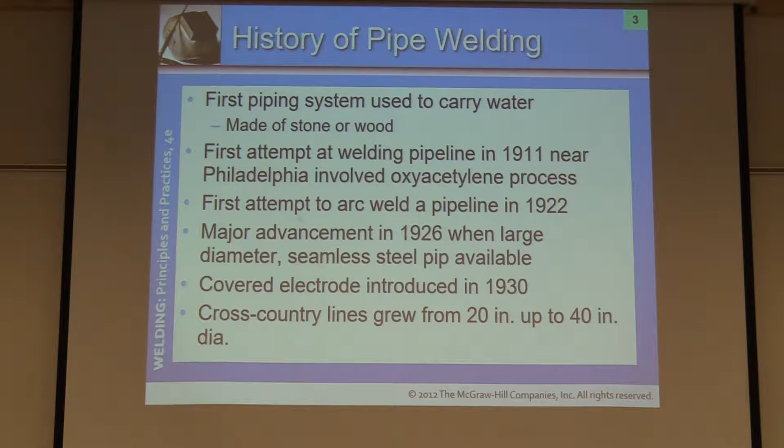The first attempt at a welding pipeline was in 1911 with oxyacetylene. First attempt to arc weld it was in 1922. Major advancements in 1926 when large diameter seamless steel pipe was available. Covered electrode was introduced in 1930, huge advancements.

So forth, let's talk about pipe welding today. You can always follow through on your book. We're on page 481. Most of the top portions are headlines within your book. If you're seeing this on a PowerPoint, you may want to highlight it in the book as well. Find where it's written, highlight it, be able to come back and study and just take a glance back over it.

Pipe welding today, they're made out of many materials and many different sizes. Of course, there's naturally more advancements in technology and metallurgy. We can do a lot of things.

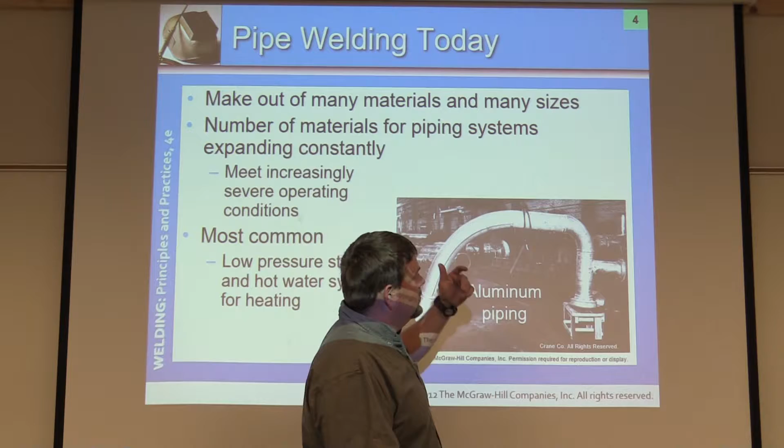They can be for many different applications, from underground sewage systems to oil and gas refineries across the nation, even your normal gas into your house and your water lines underneath the city, providing water and sewer lines to your home, as well as steam, boiler systems, hydroelectric, so forth. Piping can be used to carry a medium over a distance and maintain pressure for a lot of different uses within the industrial world today.

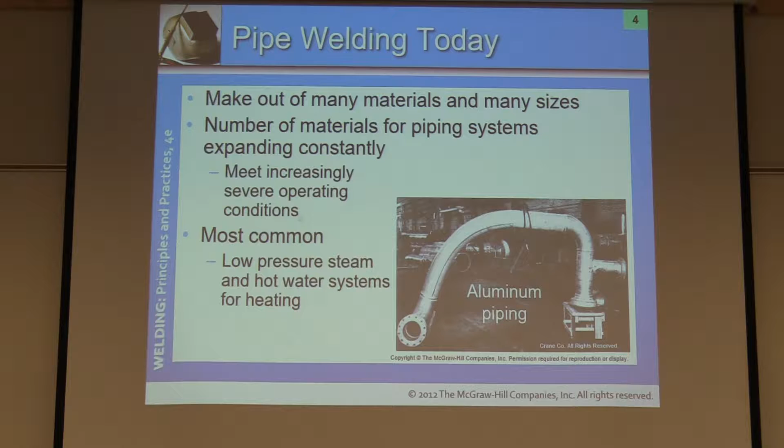Most common is a low pressure system, low pressure steam, hot water systems for heating. This is typically systems up to about 30 or 40 psi, just carrying pressure along. They're not a high pressure system, say from 1,500 to 2,000 pounds psi of steam. Naturally, low pressure systems are less critical, less dangerous than high pressure systems.

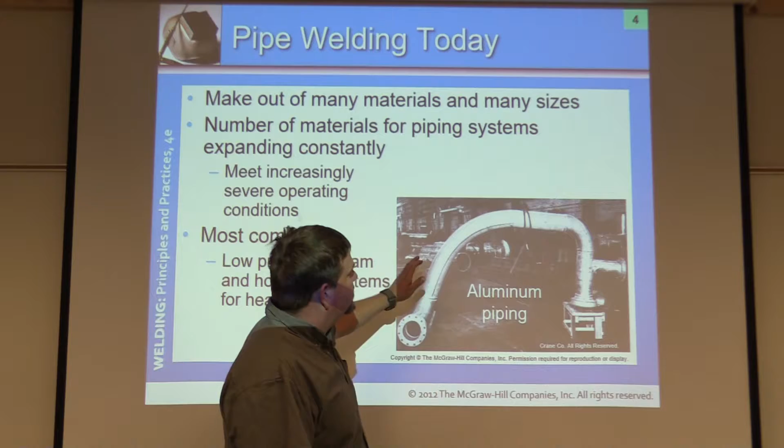Some of your low pressure systems might include caustic acids and so forth. You don't want to compress them, but you want to move them across an area. Fertilizer plants - there's a million different applications we can get into. This book talks a little bit about pipeline stuff, but remember, we use piping systems in so many different things other than just pipelines.

So many piping systems are under very high temperatures and pressure. Joint tightness is essential - power plants, nuclear sites. Welded pipeline forms the underground network, transports natural gas, crude oil, drinking water, and fuel for transportation, for sure. So we've got a branch line here, individual headers coming off of it, possibly tying into something else.

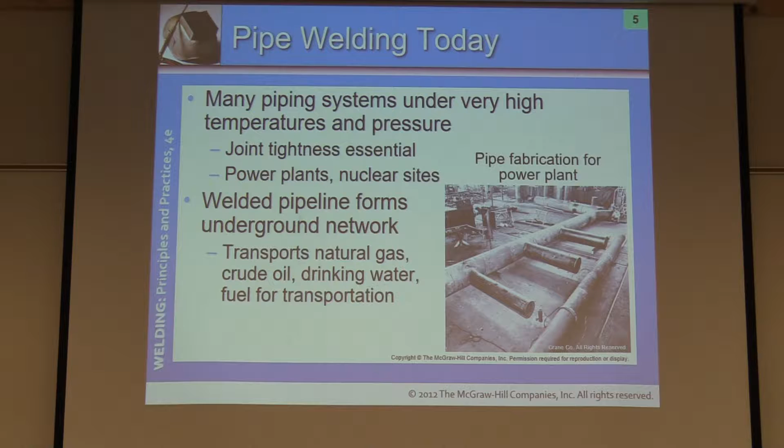Both welders start at the top and weld from top to bottom at the same rate - hopefully not the same speed though, one will be a little faster than the other almost always. Or you can pause for a second, let the other welder get going for a second or two, and then you start, so that you're not ending at the same time. One will finish, and then you tie in.

This helps control distortion. It helps your pipe from opening up on one side. If you were just to weld down one side, the weld contracts and pulls, so your gap would get wider on that side. This speeds up time, makes it a lot faster - you can just keep going down the production line and so forth.

Here, welder works from each side of the pipe.

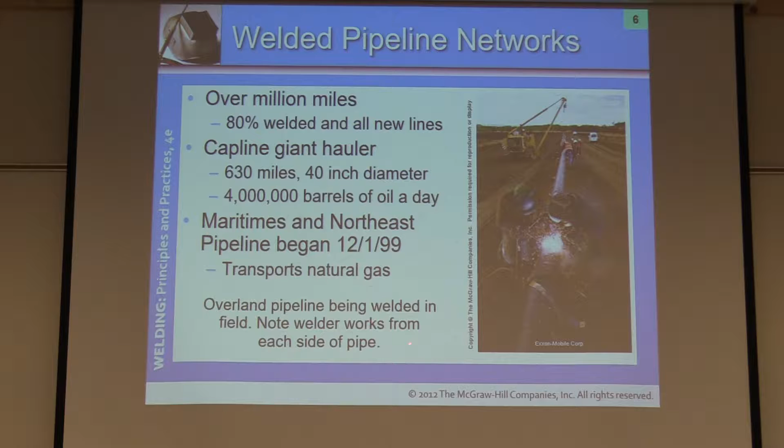I'm not going to hang up too much on the pipelines and historical sections. It's just kind of impressive to think that these pipelines are out there, already put in, and how many miles they cover. At some point you're going to have to go back and start repairing them.

So the cheapest modes of transportation to get some sort of cargo across the nation, instead of having to do it all in each individual truck. We see a lot of trucks on the road today, and sometimes there's emission issues as well. So this is a good means of transportation to get cargo across from place to place.

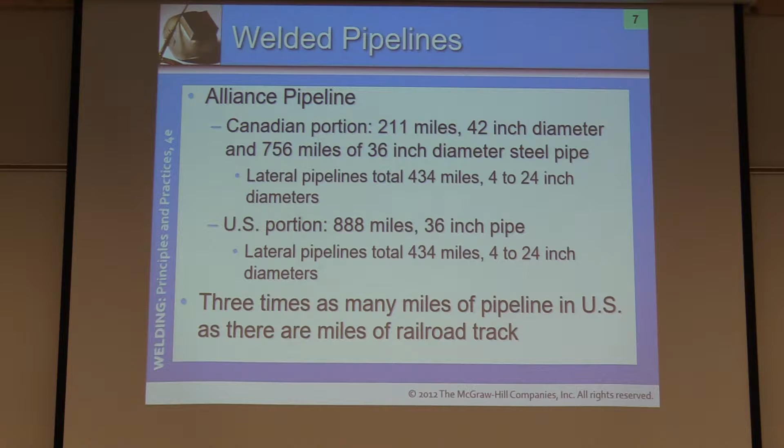Okay, so let me figure out where we're at in the book here. Product pipeline.

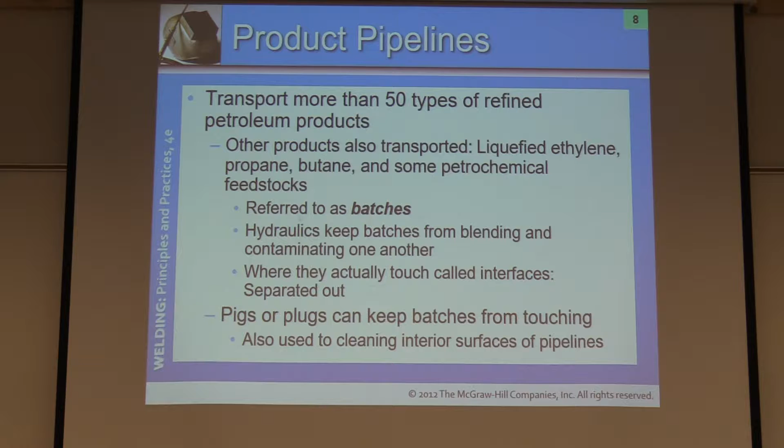We'll move on. Industries needing pipefitter welders, for petroleum, natural gas, water, and power plants.

Around here specifically, we've got a lot of water. Other places in the country don't have as much water as we do here in the Pacific Northwest. For example, I come from Wyoming, and water's a pretty scarce item there. We think it's dry here, but they have one river that provides water where I'm at - very, very limited water ability.

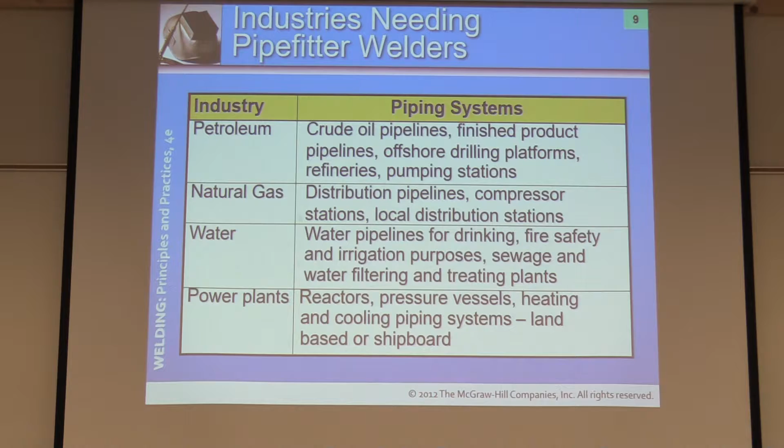So irrigation's not as common there. Around here we've got more water, more irrigation. I believe they're going to try to close it in - some irrigation districts within the state of Oregon have already enclosed their canal systems into a piping system, so there's less evaporation, less waste, less friction. You can get water to where it needs to go without it seeping into the ground and so forth.

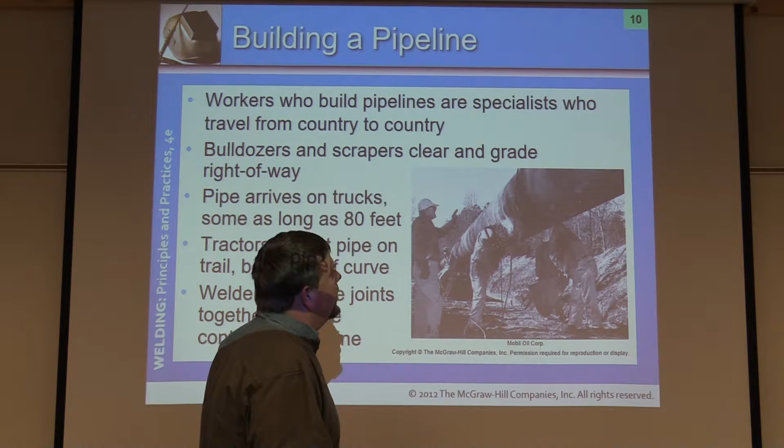So as you can see, there's a lot more than just welding involved on the pipeline. There's tractors, equipment operators, geological surveying groups, engineers, scientists and so forth that go into putting this pipeline together. It's not just you go out there, dig a hole, and put a pipe in it by any means. There's a lot of jobs created within the industry other than just welding.

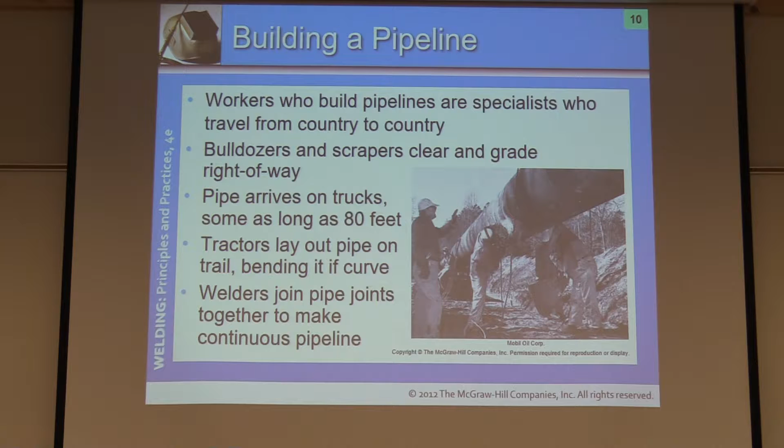However, we're in the manufacturing program, so that's what we're concerned with for the most part.

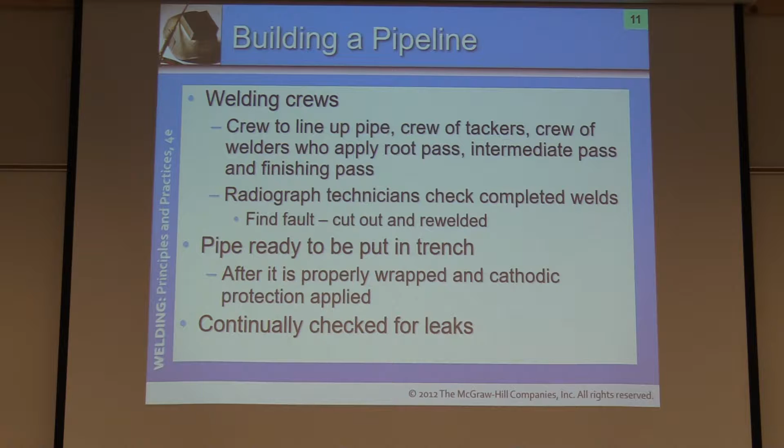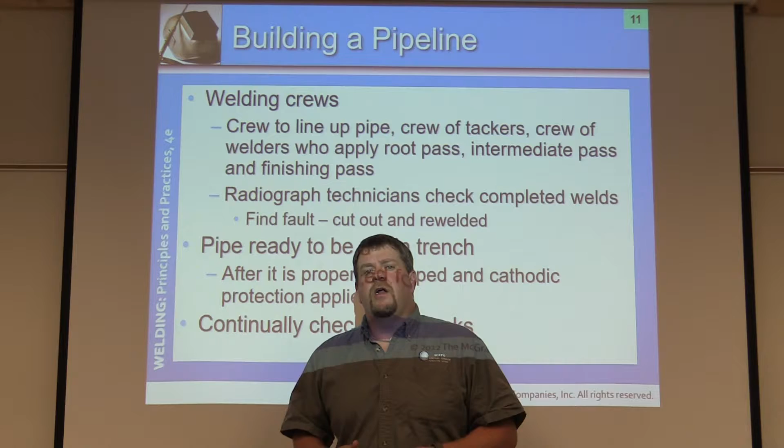One thing I want to hit on here is that radiograph technicians check completed welds. They find faults, and they're cut out and re-welded - though not always by the same person. So you weld it up, and visual inspection is always the first thing you're going to do. You might have an inspector on the job watching every one as well, or you may just be doing a weld and an x-ray tech comes along behind you to radiograph the weld, inspect it, and move on.

Now, something really important to know is when we get to this level of welding, there are very few mistakes allowed. This weld is going to go underground carrying some sort of chemical, or it could be in a power plant or nuclear plant, where it could be a catastrophic failure, kill somebody, or be very detrimental to the environment.

Typically, you're allowed 3 mistakes or 3 repairs within 6 months. If you get more than that, you're usually down the road. Now, certain companies are even more strict - in nuclear, 1 repair and you're usually down the road.

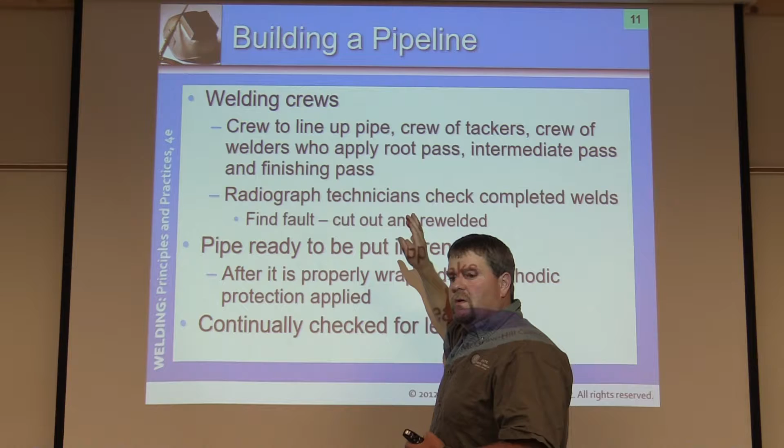We know we're not going to start out in those industries right away, but over time we're going to get more comfortable and become a better welder, understanding what code quality is, to where we can make $100 to $150 an hour if we wanted to travel across the world and chase the money.

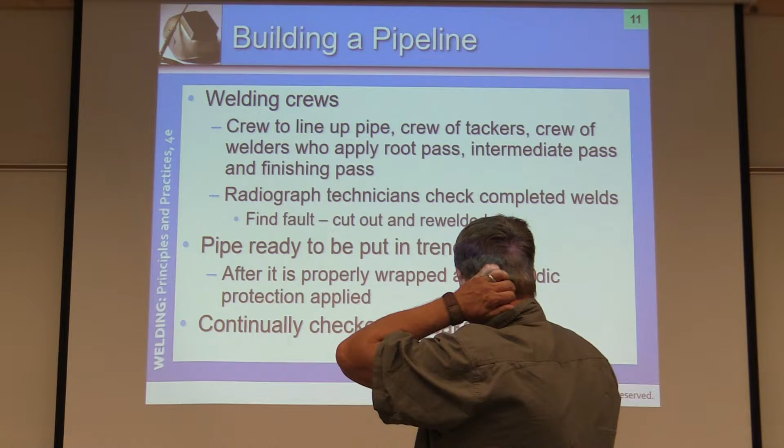A lot of times they'll come back in, flag it, and all bad welds will be flagged with a certain color ribbon. So you could pull onto a location, and if you had all good welds, it would be fine. If you've seen a bunch of flags, you know there was something wrong - that's usually when you want to start looking at moisture within your electrodes, gas situations, and so forth.

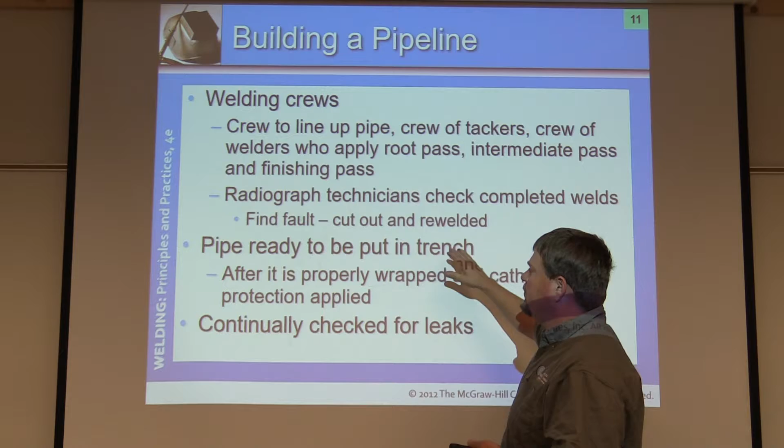After it's welded up and radiographed, then it's ready to be put in the trench, or put into service if it's above ground.

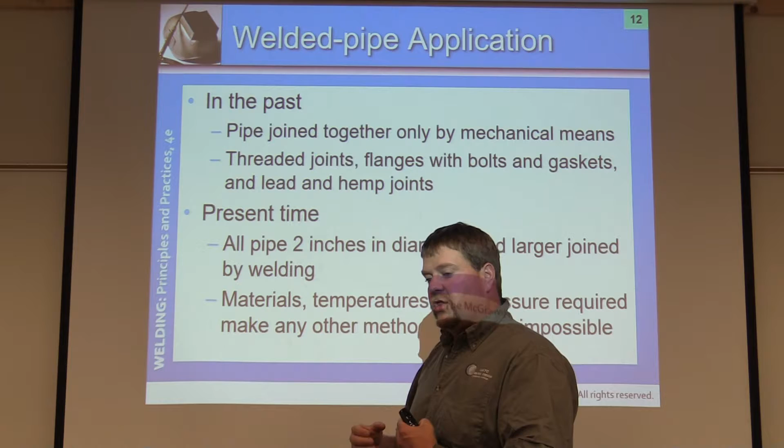So threaded joints, flanges, bolts and gaskets, lead and hemp joints - that was kind of the thing in the past. Yes, they worked, but you're getting a huge reduction in material, and when you cut threads into something, you're cutting a certain part of the material away. When you weld it up, it's still the same wall thickness. Yes, with a threaded pipe system you're putting a fitting over top of it, but it can still create a leak between those two systems - it doesn't mean it's stronger because the fitting is there. It means the wall thickness is smaller or thinner, so it can take less pressure, less abuse, less corrosion. It also takes a lot more time to come back and repair a threaded pipe system than if it was welded up correctly the first time. This saves money on installation, fittings, and so forth.

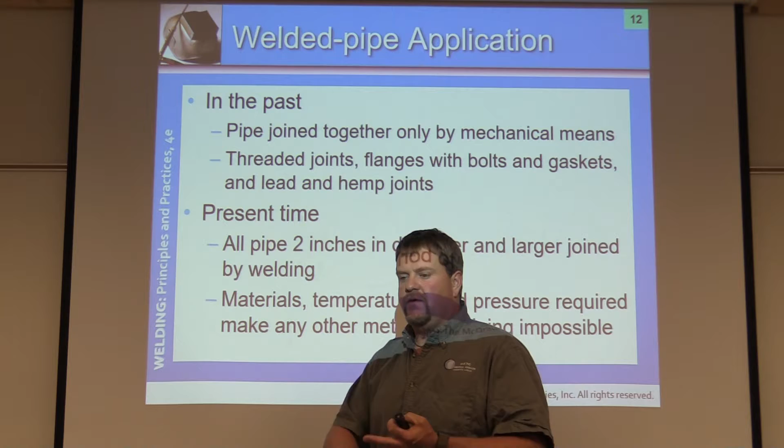At the present time, almost all pipe 2 inches in diameter and larger is joined by welding. Some companies have restrictions on that. Some say it's hard to find welders qualified in 2-inch pipe, so they may do 2-inch and below with a threaded fitting and so forth.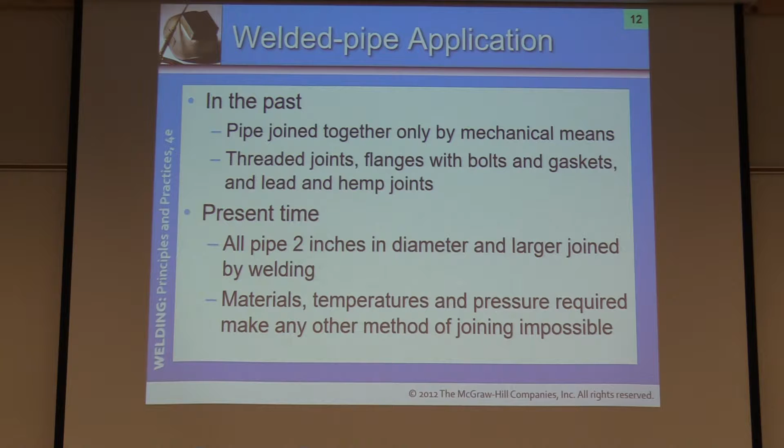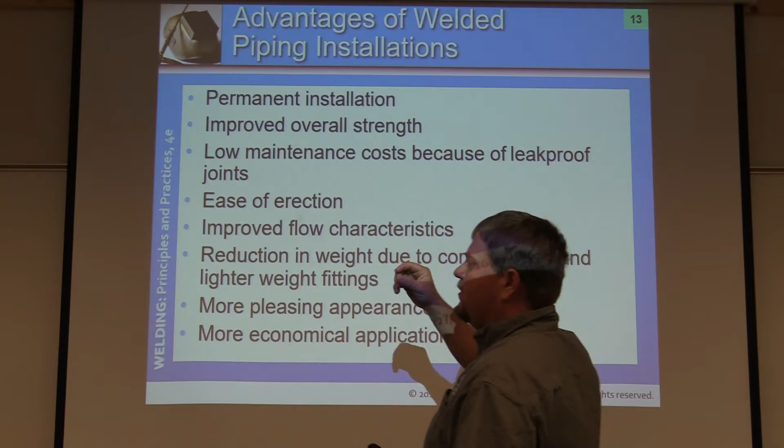Advantages of welded piping installations: permanent installation, improved overall strength, low maintenance costs because of leak-proof joints, and ease of erection. A lot of times if there's a little bit of misalignment within a welded fitting, we can usually find a way to weld it up or fit the material or pipe better. If it's threaded and there's some misalignment, it doesn't go together quite as well.

I like to call it the liquid wrench. Sometimes we're able to fill a little bit bigger of a gap if it's off a half or one degree. Usually you can make it work and get in there and weld it up nice.

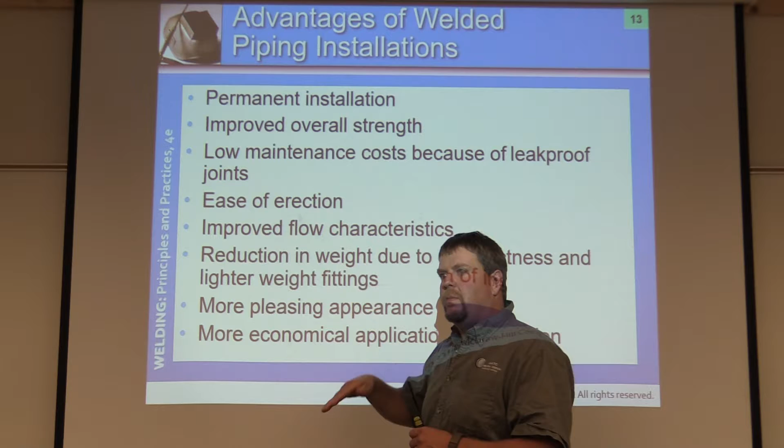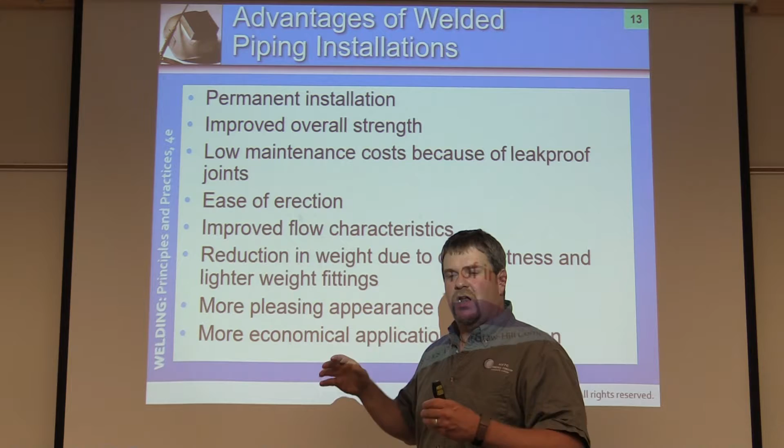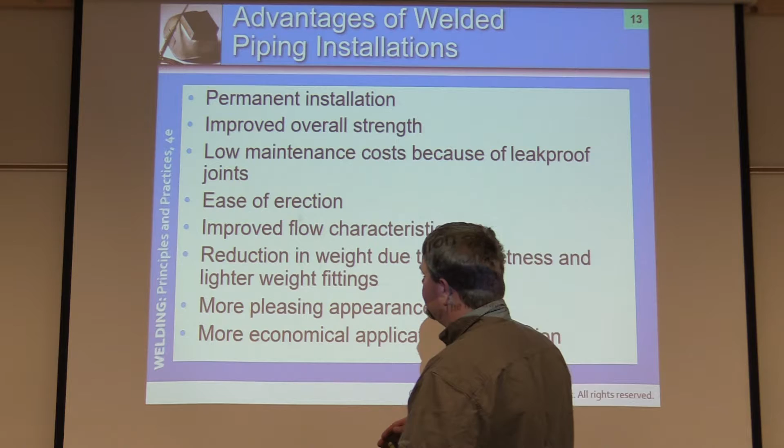Improved flow characteristics are a very important part of many different aspects, specifically steam, petrochemical, and acidic materials. It's kind of like anything else - remember the old school slides when we were kids? You go down, and if you hit a bump where they put the two sides together, you left a piece of skin on that slide, right? Well, fluid does the same thing - it hits that and it can wear it out, building up gunk on that piece. The liquid and flow material flowing through a piping system is the exact same way. It's going to build up gunk. You want less turbulence within the pipe - just a nice steady slide through the material rather than catching a piece and being stuck.

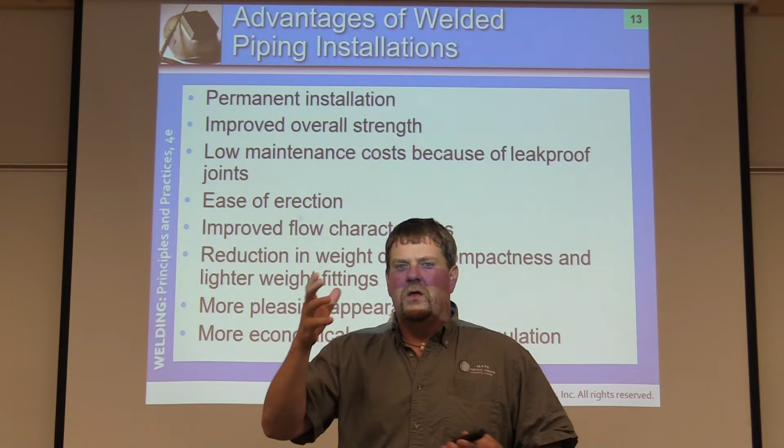Reduction in weights due to compactness and lighter weight fittings. If you've ever dealt with the two, you'll know that sometimes a threaded fitting might have 3/8 inch thick wall, but a welded 90-degree fitting might be down to .280, only a quarter inch material. Again, it's almost half less material than what was originally spec'd for.

More pleasing appearance, and a more economical application of insulation. In your book, see if it'll show the slide.

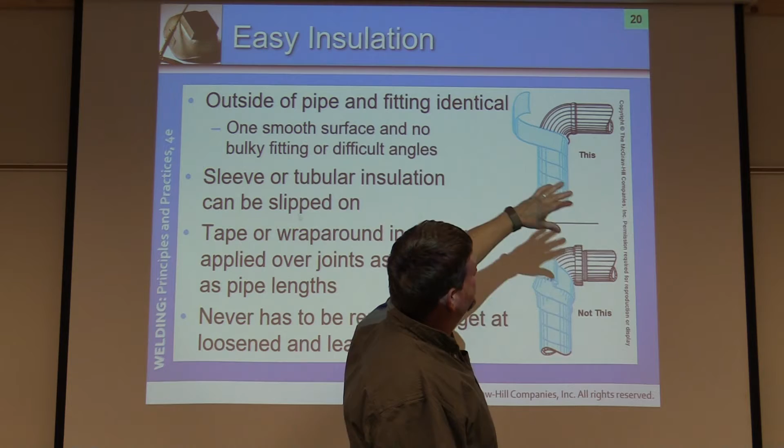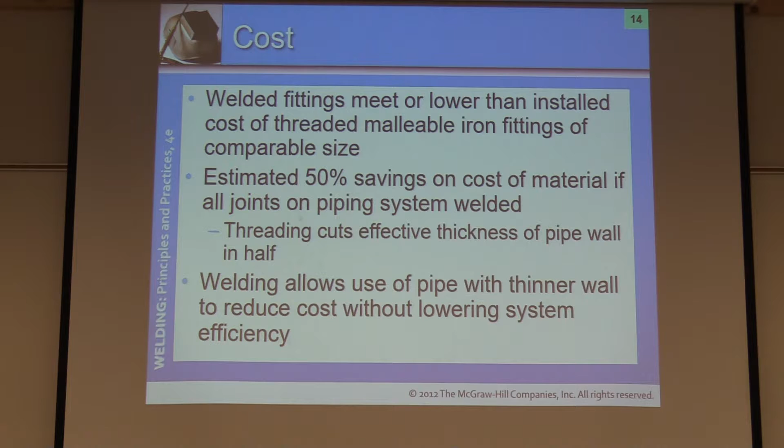Estimated 50% savings on the cost of material alone - that's without labor and everything else, just the cost of material - compared to threading. Threading cuts the effective thickness of the pipe wall in half, as we specified a few minutes ago. Welding allows us to use pipe with thinner wall to reduce the cost without lowering system efficiency. This also helps contribute to weight factors as well.

Strength: welded fittings have the same thickness as the pipe in which they are used, joined to the pipe by equal thickness of weld - should be, if it's going to be a code quality weld. No loss of strength as caused by thread cutting, so there's still the same thickness of wall. Less corrosion as well - life expectancy of the welded system is double that of the threaded pipe.

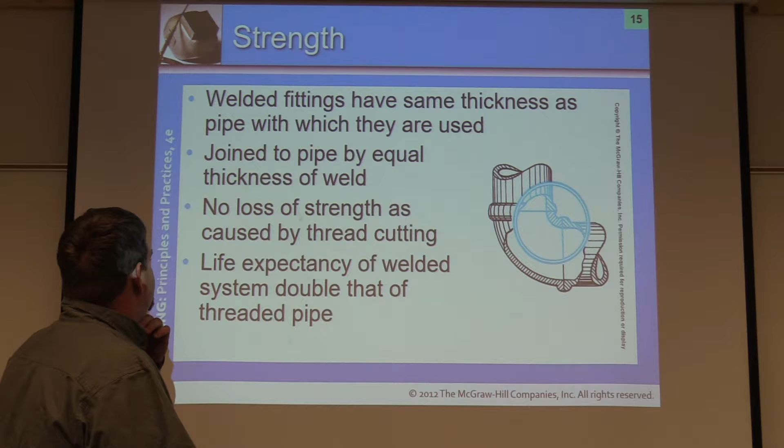Joint security: permanently joined by metal bond. Does not depend upon strength used in wrenching nor the amount of pipe dope applied.

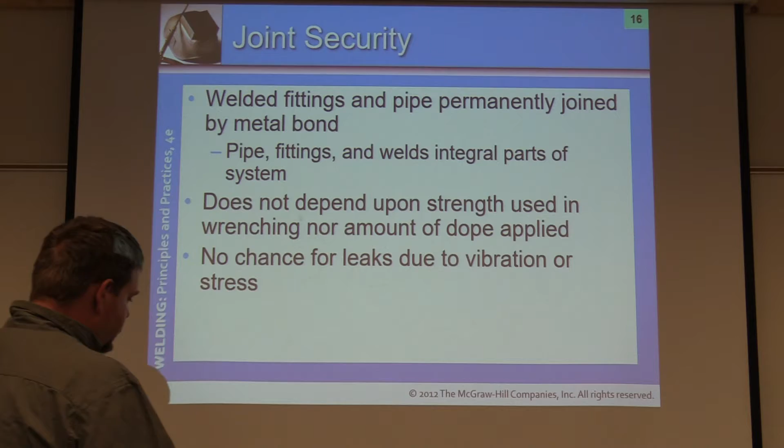So you've got two different types of thread sealant. Usually you'll have Teflon tape, which most of us have seen, but some haven't. You apply it to the threads, and it has to be wound in a certain direction so that it tightens with it, instead of the opposite direction where it would untighten or unravel as you're tightening it on. Then on top of that, you would put a liquid Teflon, which helps lubricate and seal all the little air voids as well.

Now, certain codes and certain applications - I remember doing a boiler system that required pipe dope or a liquid compound applied to it, which we commonly refer to as pipe dope. You would tape it with a thread sealant, and then come back and put pipe dope on top of that as well. There's no chance for leaks due to vibration or stress, which is important because it should not work its way out - it's all one piece of metal at this point.

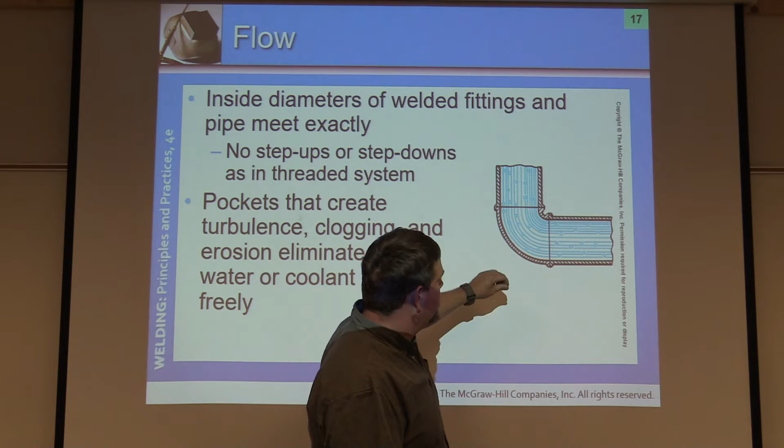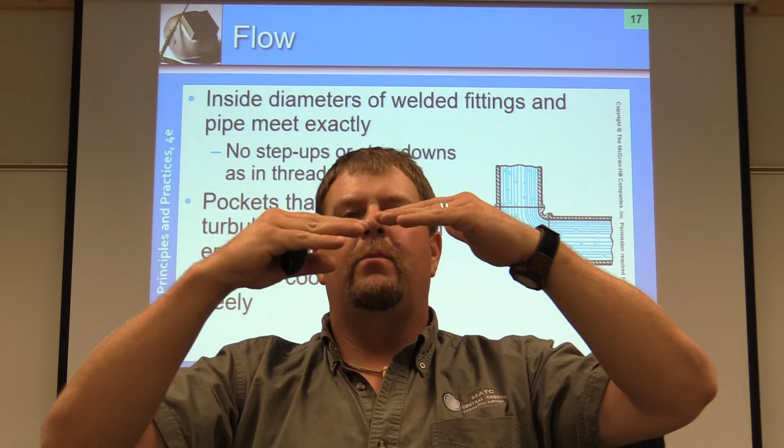Flow: the inside diameters of welded fittings and pipe meet almost exactly. There's what we call low-high, where one piece might be low and the other piece might be high. You're allowed about 1/8 of an inch overall within the pipe, depending on the code, but that's usually the standard. So instead of being aligned perfectly, you're allowed 1/16 of an inch misalignment all the way around the pipe, to a cumulative of 1/8 inch total. A 16th here and a 16th here, 2/16, 1/8 of an inch.

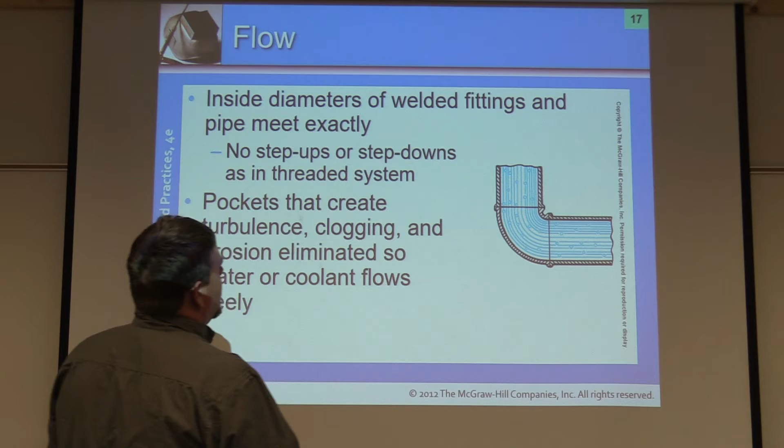There are no pockets that create turbulence, clogging, and erosion, they're eliminated so water or coolant flows freely. By now we've probably seen some other videos where we talked about how things create turbulence and quite possibly sit there and erode, creating a micro pressure system around that eddy current, so to say, within the piping system.

Installation: no need to calculate overlaps for threading. Makes roughing in quicker because pipe is simply cut to length, placed in position, and then welded up. Now this is all relevant to having good welders, okay? And code quality welds. I mean, just like anything, this isn't a perfect world.

However, if a company has a hard time finding good welders and they're consistently failing welds, failing X-ray and not meeting the specifications they need, I've seen companies go back to having like a 2-inch threaded mandatory fitting. They would spend more time because they didn't nearly have as well qualified welders to be able to install and weld on these systems.

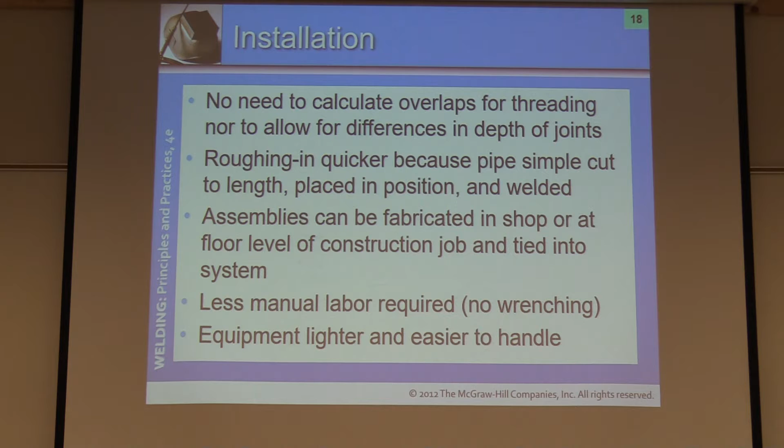The equipment is lighter and easier to handle. Again, we talked about that. Less weight in the air means less problems, less sag, easier to brace and block systems up.

Testing and repair: threaded piping systems will have leaks to tighten before a system goes into operation. And once you start that, okay, it can be really hard. So say you have 95 threaded fittings in a line, and your leaks start at fitting number 4, okay, or even number 30.

Now they should have been made sure that they're put on, but they usually don't. Let me back up for a second. They should have been checked and inspected before moving on. Now in welding, that's easy to do. Sometimes what you'll do is prefab pieces, like 10 welded pipe joints. They'll come in, X-ray it, make sure it looks good, meets inspection, plus they'll do it visually, and they may even pressure check it in the meantime, okay?

But as you start threading pieces together, unless you have a bunch of unions to join them in between sections, it makes it really hard to come back and fix a leak at the beginning if you don't test it until all 90-some fittings are put together, and then you air pressure test it. If you start finding leaks, then it's a lot of work to come back, unthread everything to tighten this one up, and then go back along, okay?

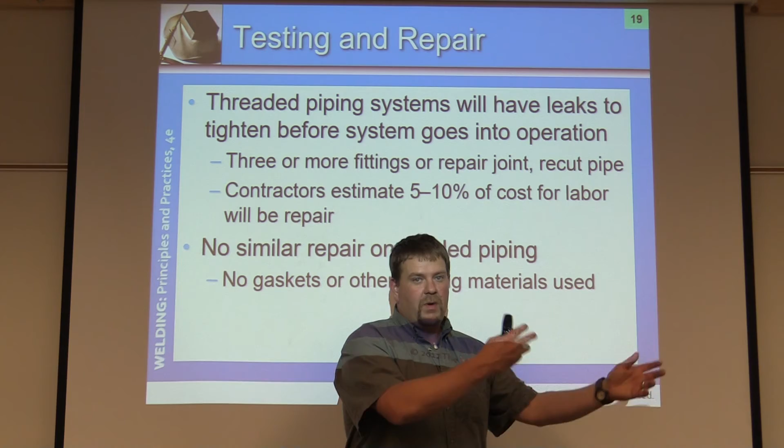Versus if there is a problem with the weld, you can usually go in, cut it out with a torch or a grinder or air arc, fix it right there, and you're back in business. You don't have to tear the entire thing apart in order to do so, okay?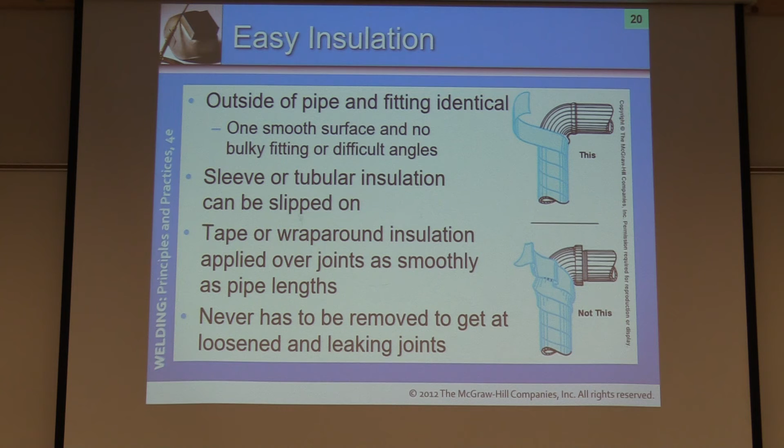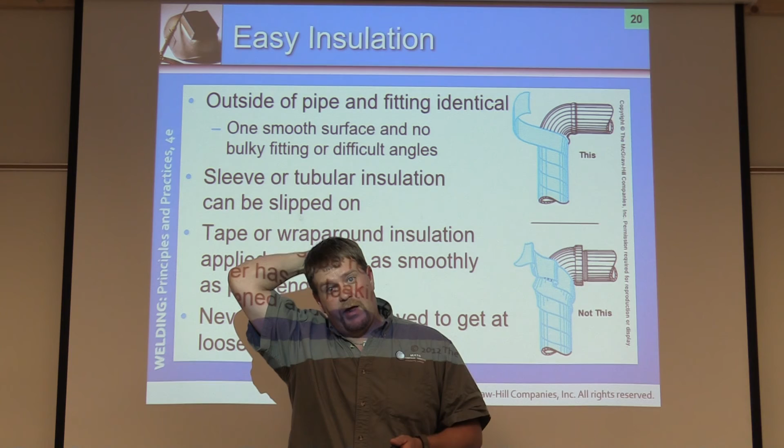This is really important for systems that need to maintain temperatures as well, especially in a place where you see drastic temperature changes, as in Central Oregon or Wyoming, the Rocky Mountain region. We have a tremendous amount of temperature variance within a day. Especially in the fall and springtime, we might see freezing temperatures at night and then 75 or 80 degrees during the day, okay?

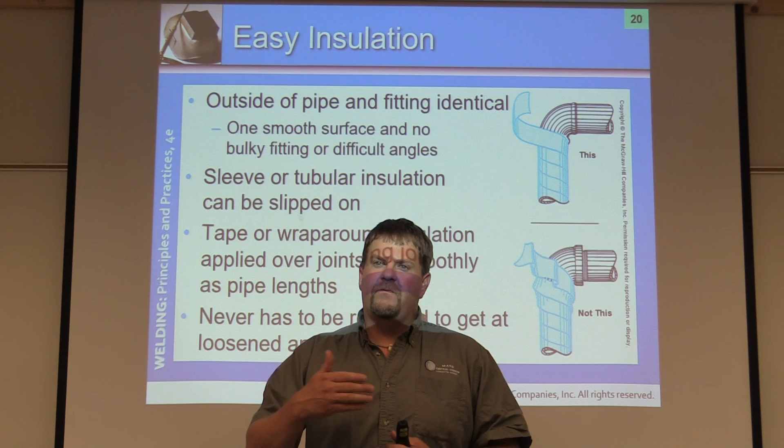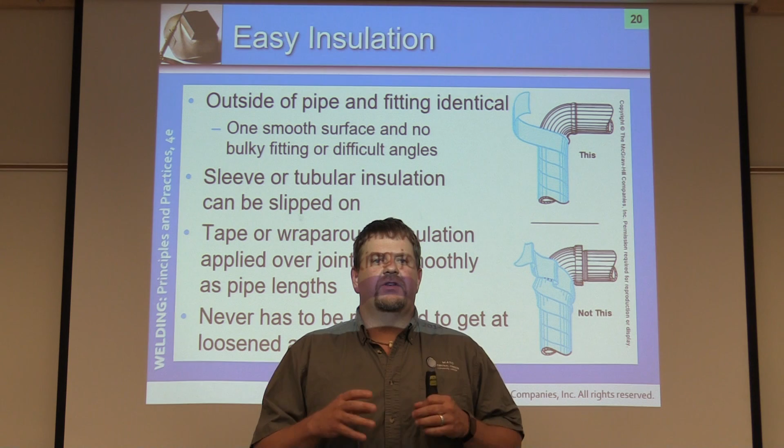So depending on what it's carrying, the temperature of the surface condition within the material can greatly influence the pressure and the flow, and it can either be a good thing or a bad thing. So say, for example, we're carrying a liquefied petroleum product, okay? Now say we're in the middle of Central Oregon, it's 20 below zero. The viscosity of that material is going to increase enough to where it's going to be hard to move it, okay?

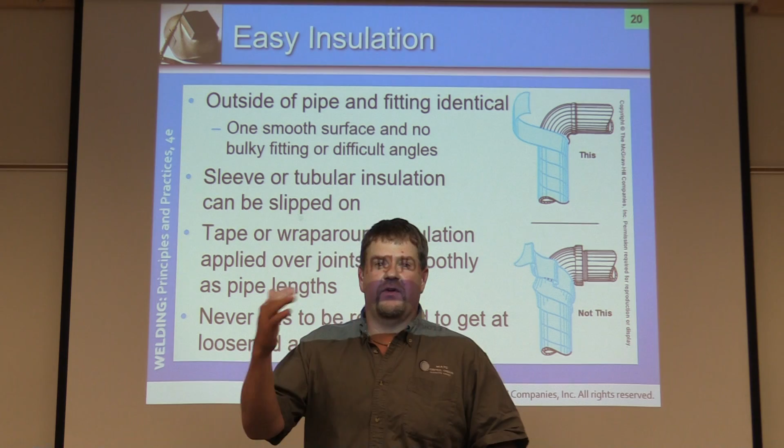So they may possibly have to run heat tape during certain times of the year. So if it drops below 32 degrees, the sensor's going to pick it up, turn the...